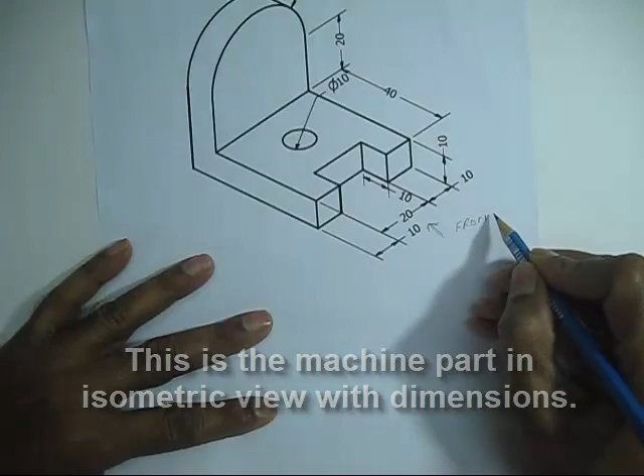In this video, we will learn how to draw orthographic projections of a machine part. So this is the small machine part given here, and this is the front view. We will use this view as the front view. Then this will be the top view, so looking from the top.

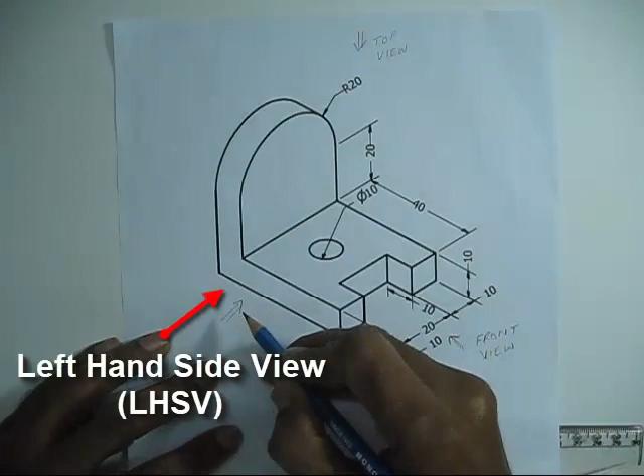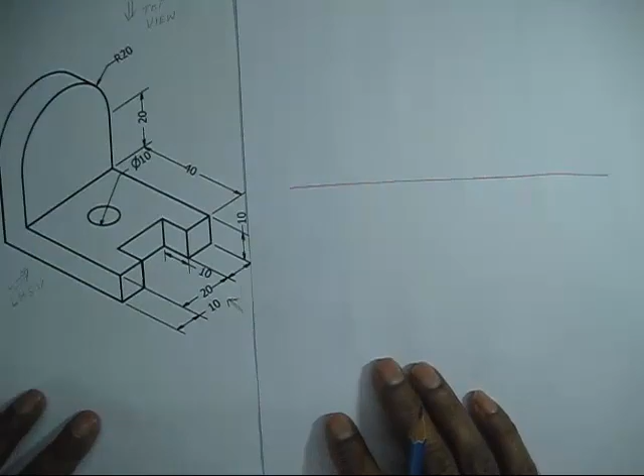And from the left hand side view, we will see how we present the left hand side view. Let us first try freehand sketching before we draw it on a drawing sheet. First we draw the reference line XY, and the front view will be above the reference line XY. We start from the base of this machine part. The base is divided into three parts as shown here.

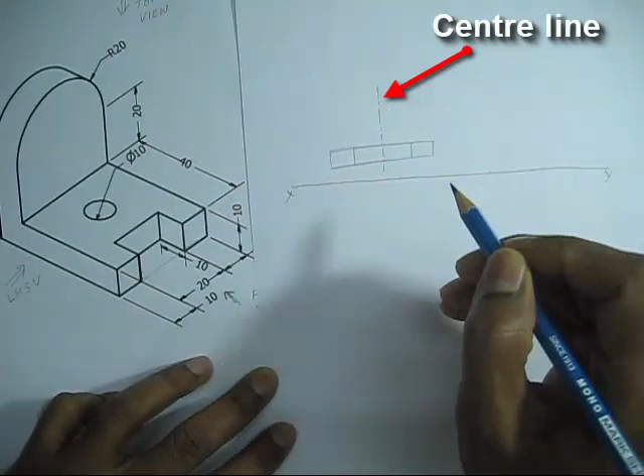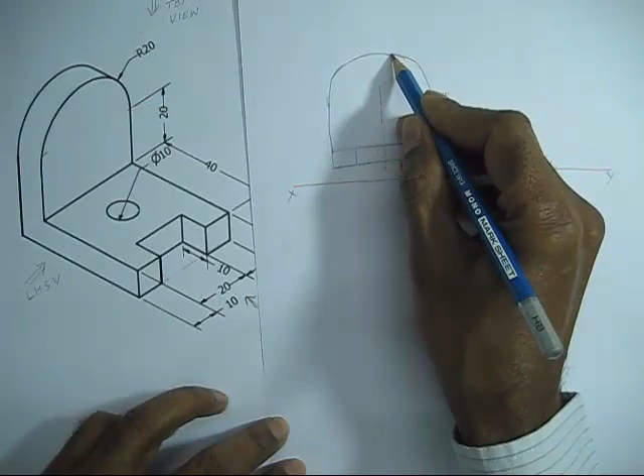This is the center line. This part is 20 mm above the base, and beyond this it is semicircular with radius of 20 mm. Now the central hole will be shown as dotted line in the front view.

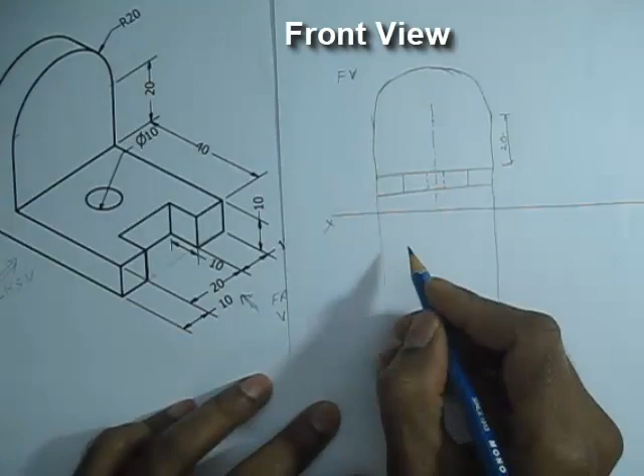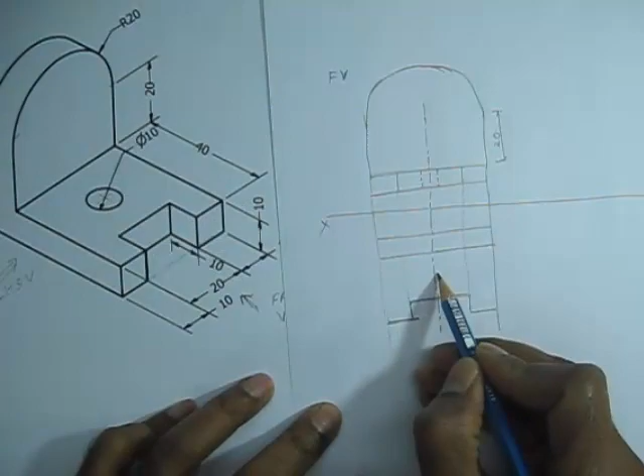Now the top view will be below the XY line, below the reference line. So this thickness of the vertical part, and then we see the top view. In the top view we will see this cut part. The center line can be extended further down, and the central hole will be drawn on the center line. Location of this hole is not given here, so we will assume it at the center.

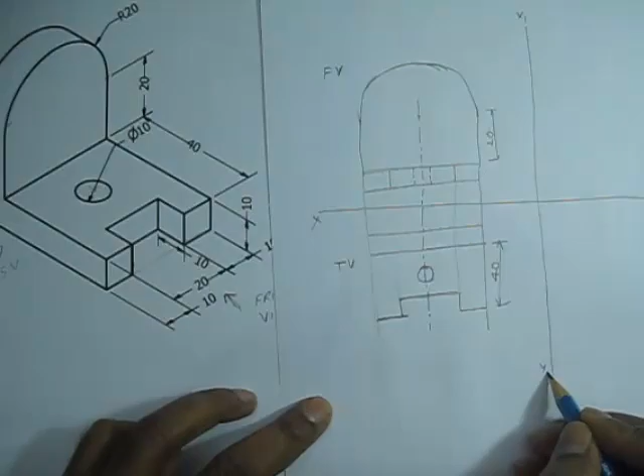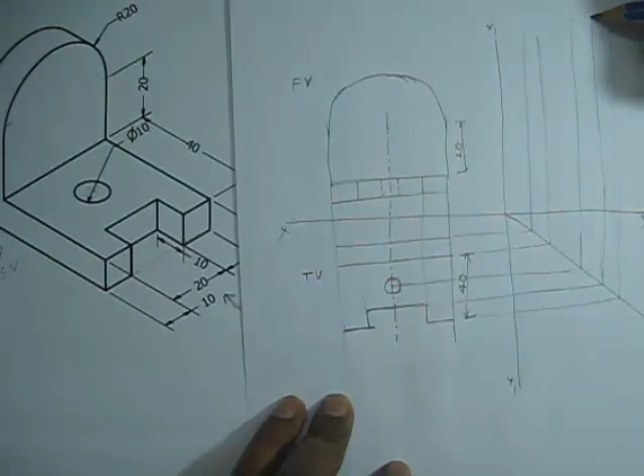Now this is the top view, and then we will draw the left hand side view. So first we draw another reference line X1Y1. We draw a line which is at 45 degree to the first reference line, and we extend the construction lines as shown here. So these construction lines have been extended in the vertical direction upward, so that we pass all the dimensions for the left hand side view. From the front view also we project all the dimensions for the left hand side view.

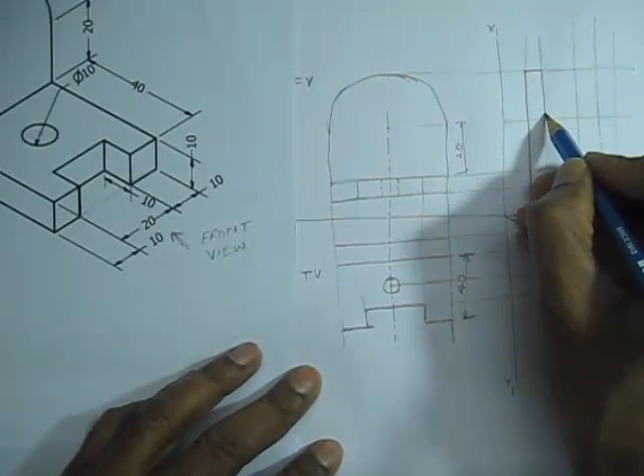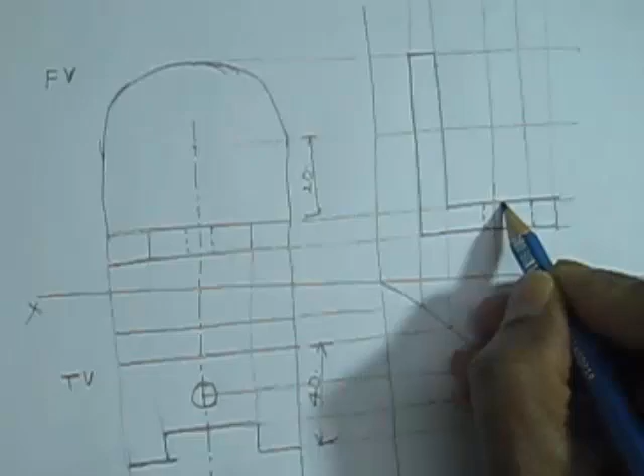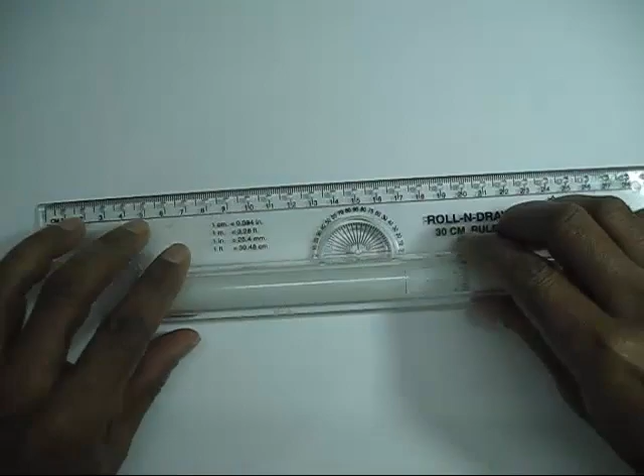Now the left hand side view can be formed using the projection lines. These are construction lines. So the left hand side view will be like an L shape. And here these features will be shown as dotted line because these are not visible in the left hand side view. The central hole will also be shown as dotted line. So this is the left hand side view of this machine part. So now we will draw this on a drawing sheet.

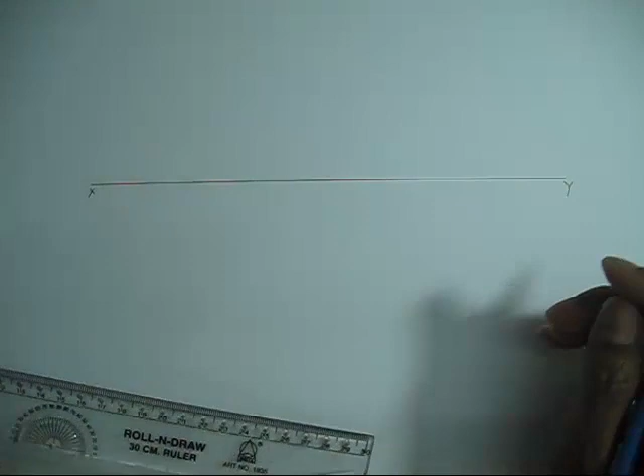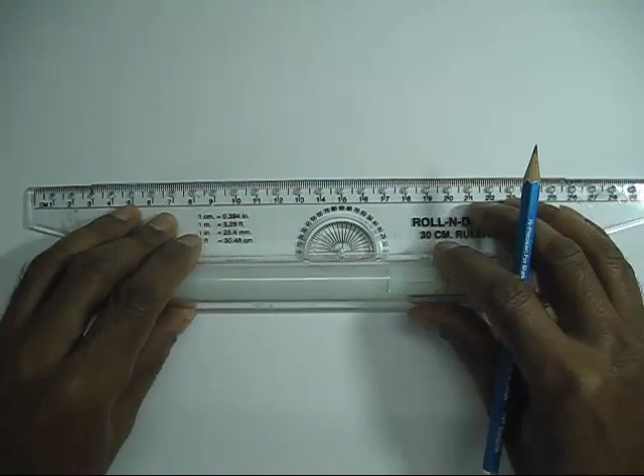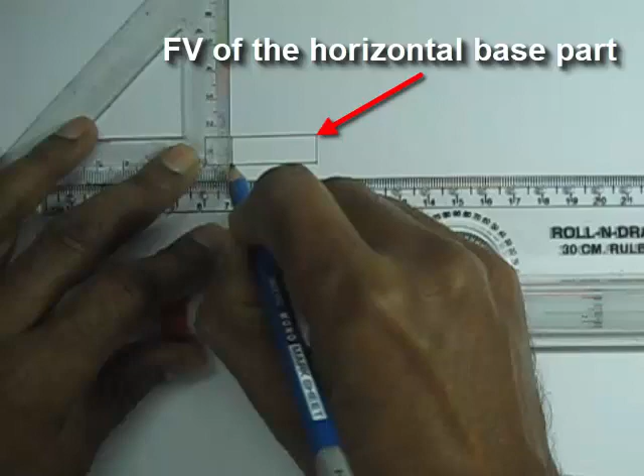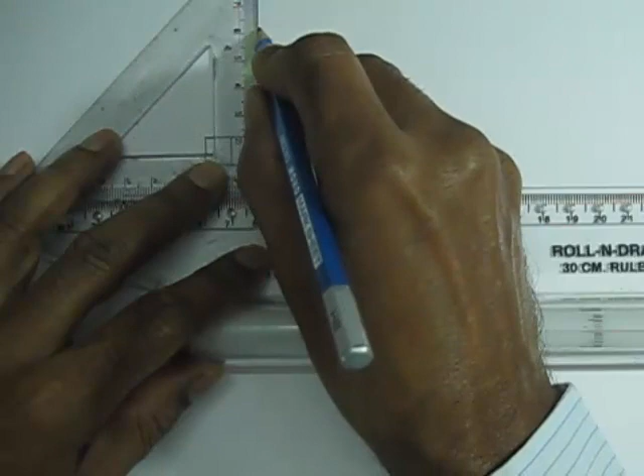Reference line XY. We will again start from the base for the front view. So this is the base of the front view, which is divided into three parts. The center line can be drawn here. Center line can be extended further down for the top view.

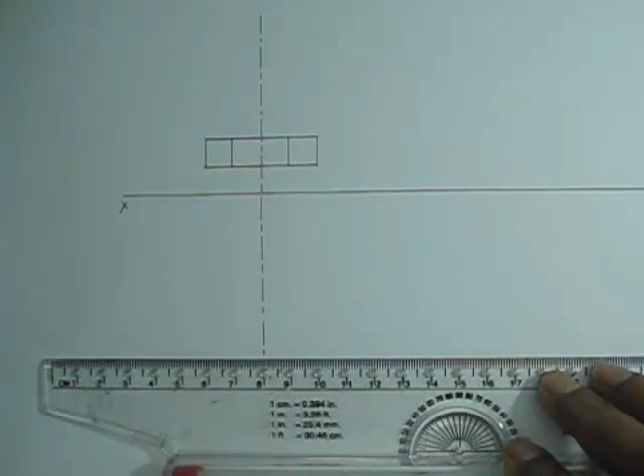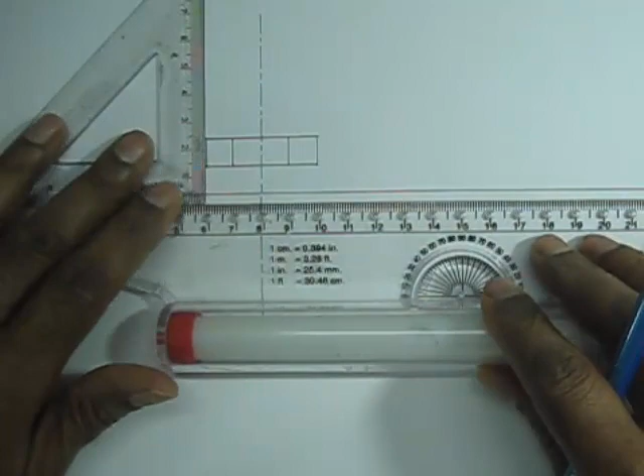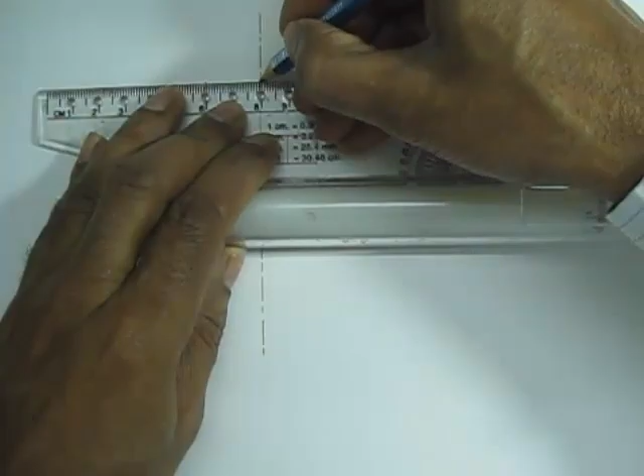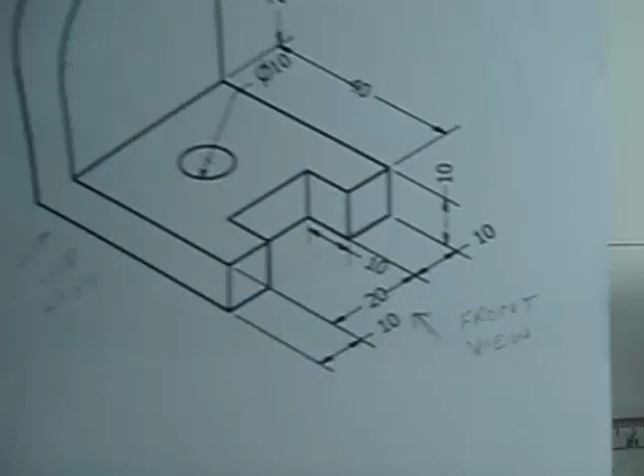Now the base part is ready. Above it, we will draw the vertical part. So first 20 mm above the base. Then on top there is a semicircular part. This is the center of the semicircle. Now the vertical part is also ready.

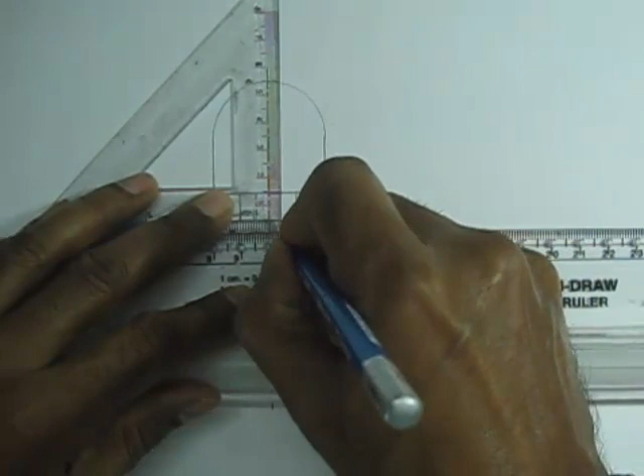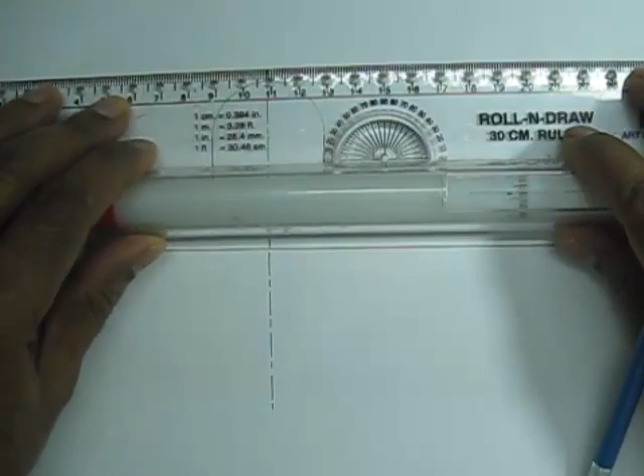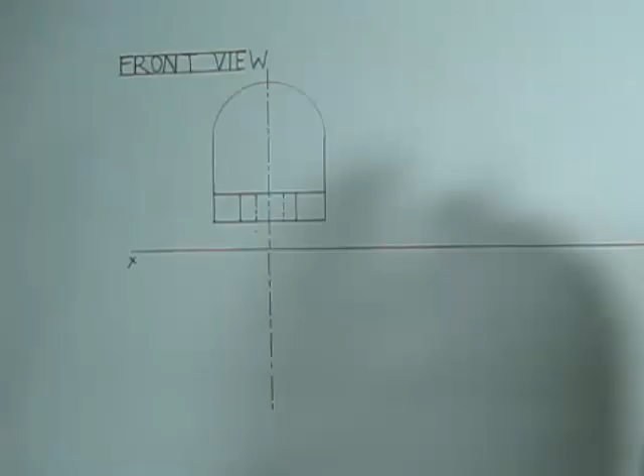Now we will make the hole. The central hole will appear as a dotted line in this case, because this hole is not visible in the front view, but the presence of this hole is recognized by drawing a dotted line. So two dotted lines for the central hole. So this is the front view. So the front view is ready.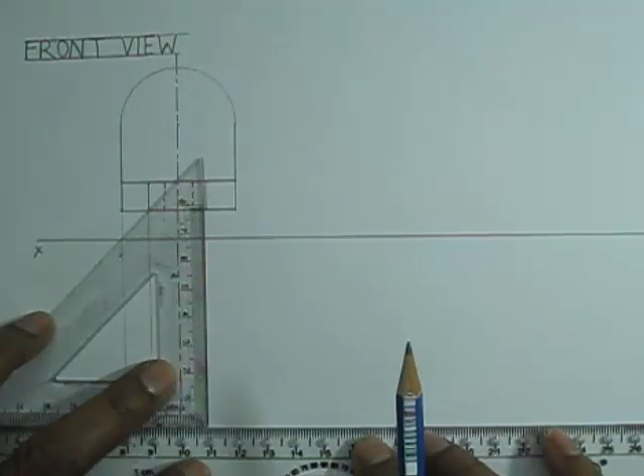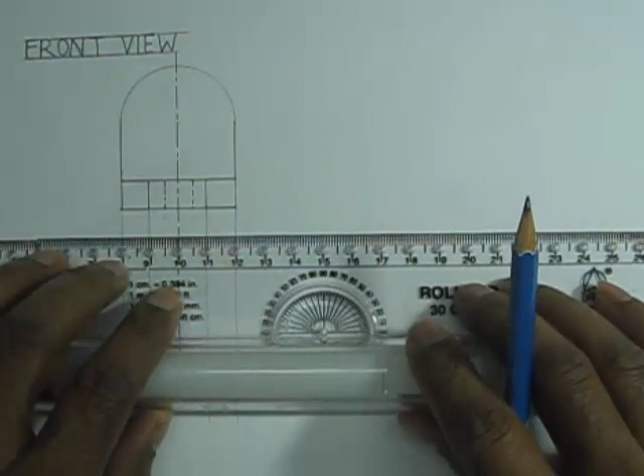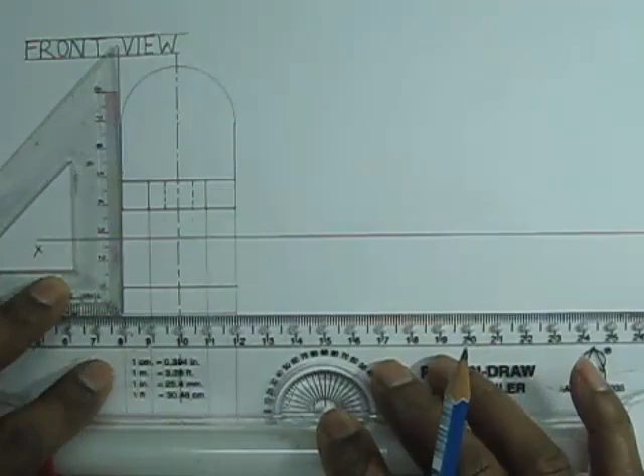Now we will make the top view of this machine part. So we extend all the dimensions using construction lines. The top view will be drawn below the reference line in the first angle projection system. So in the top view, the vertical part will be seen. So we will start with the vertical part. The semicircular part will be seen as a rectangle here in the top view. Thickness of the vertical part, we will take it as 10 mm.

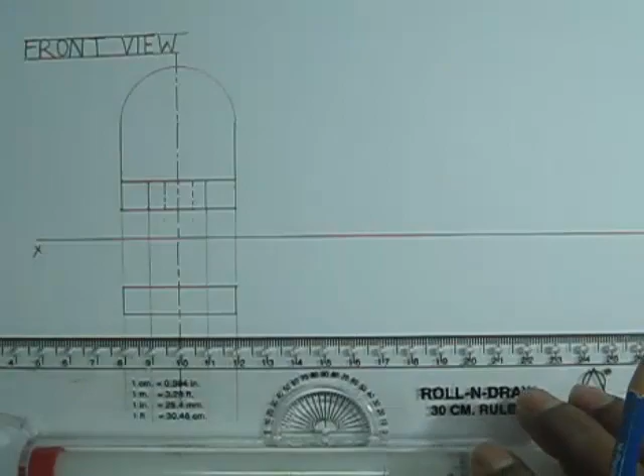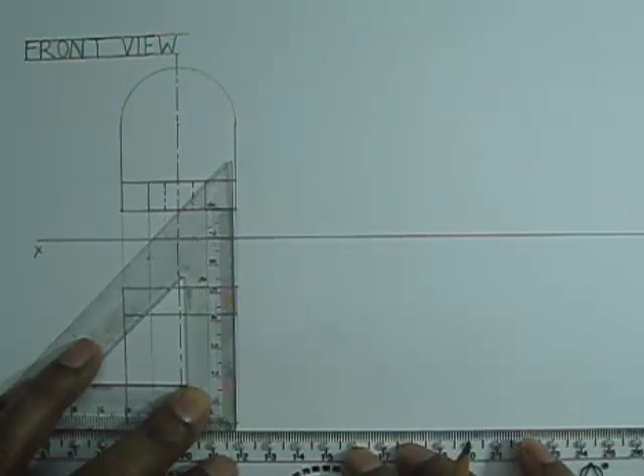So the vertical part will be seen as a rectangle, and the remaining parts we will draw. Outlines are always drawn as thick lines.

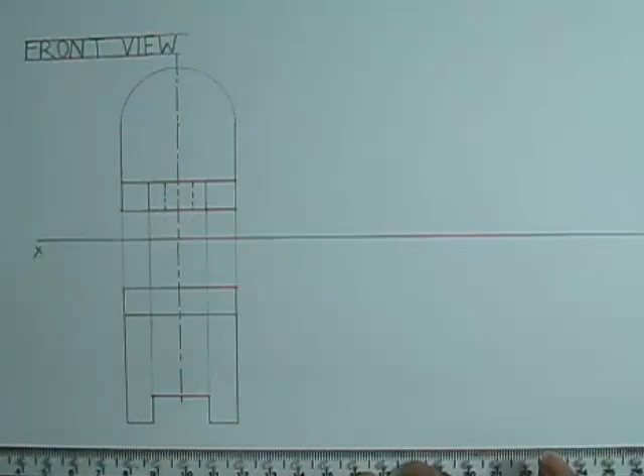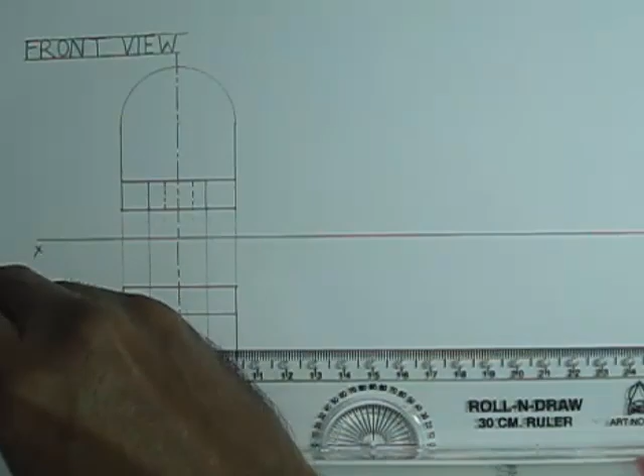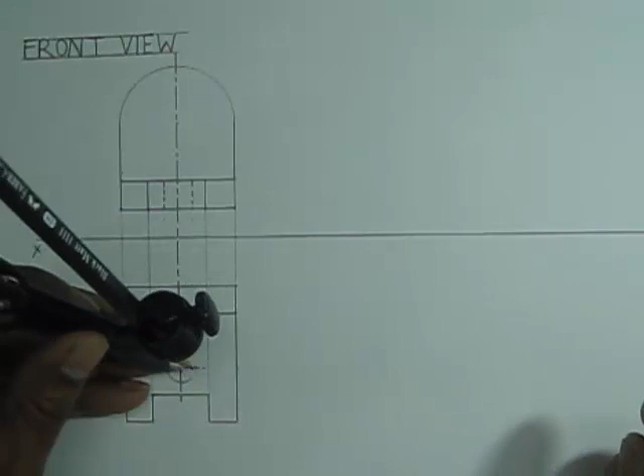So we will make the central hole in the center of this top view. The radius of this hole is 5 mm. So we will make the hole of 5 mm radius. This hole will be visible in the top view. Therefore, it will be drawn as solid line. So the top view of this machine part is ready.

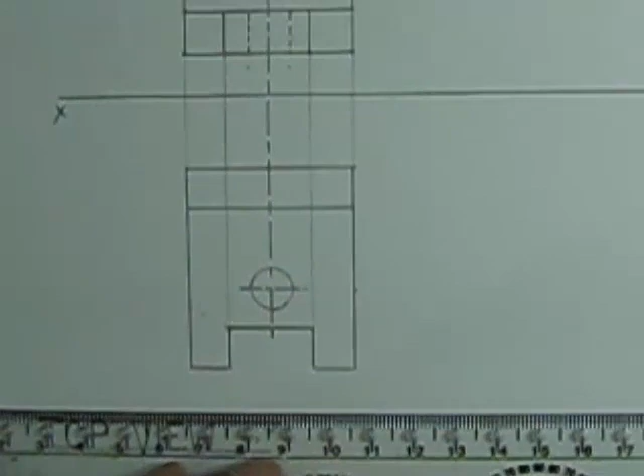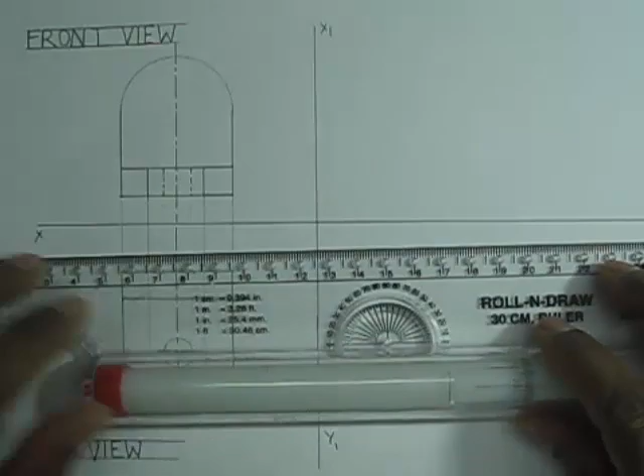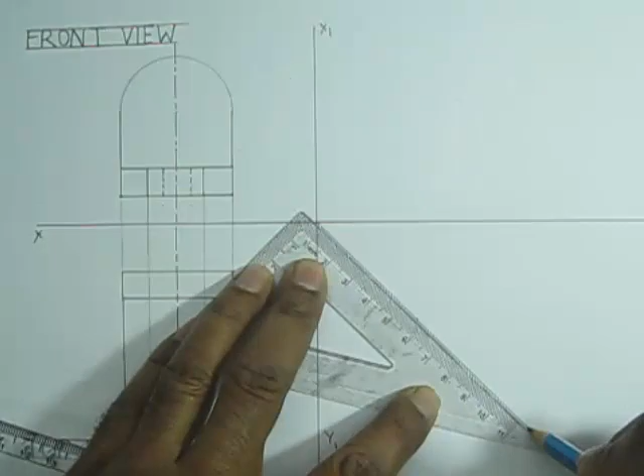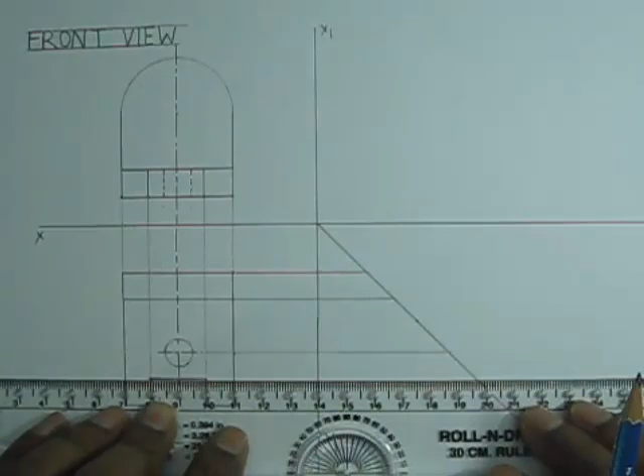Now we will make the left hand side view. So for that, first we draw another reference line X1Y1. And then we draw a line at 45 degree to the first reference line XY. Now using this line at 45 degree, we can transfer all the dimensions from the top view for the left hand side view as shown here. So these are all construction lines, so they should be thin lines.

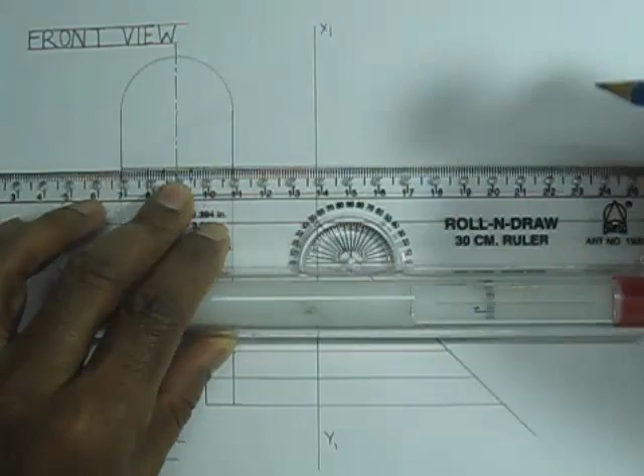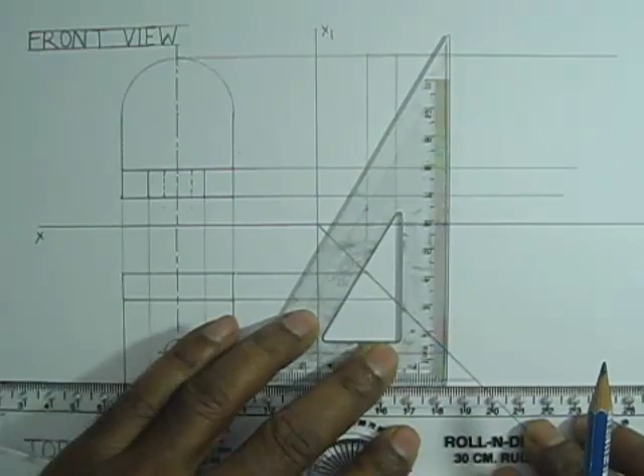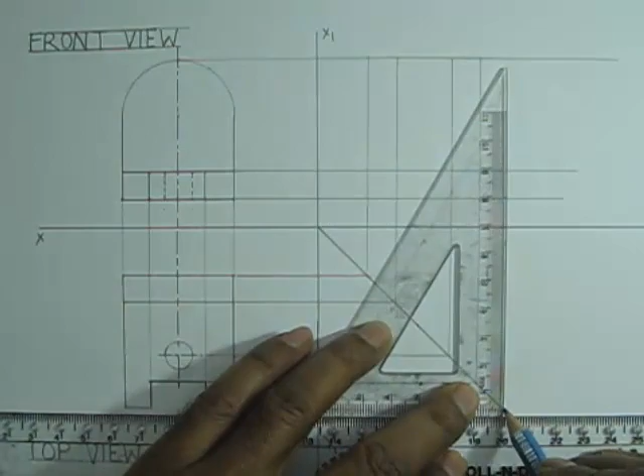So these are the projections from the front view. Again, all the dimensions are transferred for the left hand side view, so we do not have to do measurement again. So these dimensions are from the top view. So now we can draw the left hand side view using these construction lines. So the side view will look like an L shape.

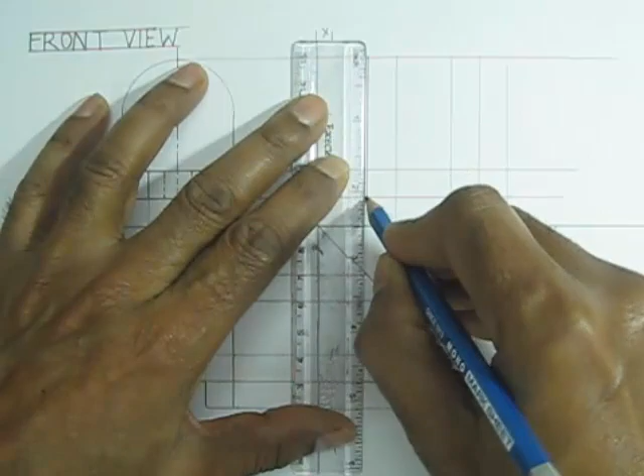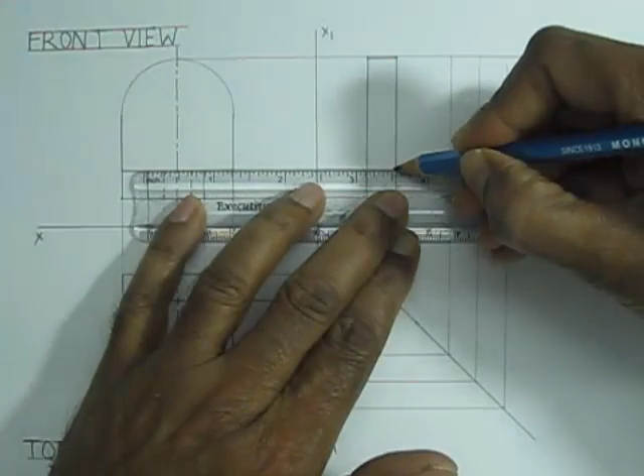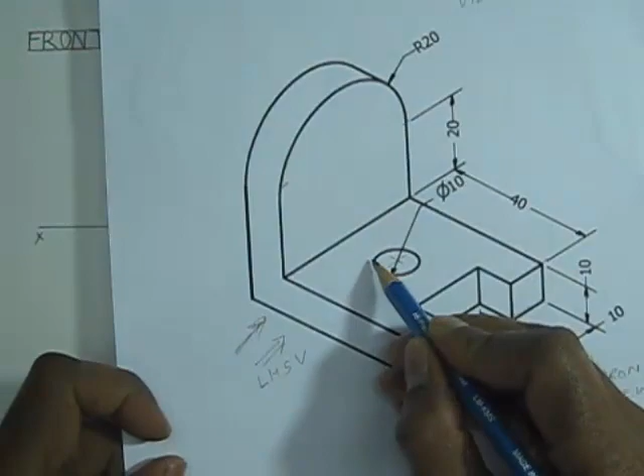The vertical semicircular part will be shown as a rectangle in the left hand side view. So this is the side view of this machine part. These edges will appear as dotted lines. So we will draw the dotted line for these edges which are not visible in the left hand side view, but the presence of these is recognized. Similarly, the presence of this hole will be recognized by drawing a dotted line.

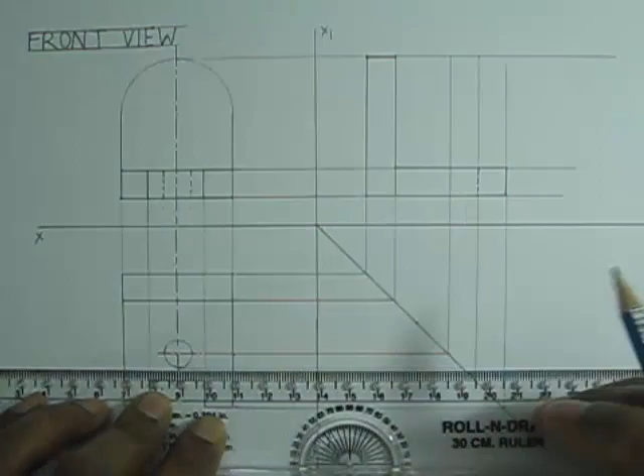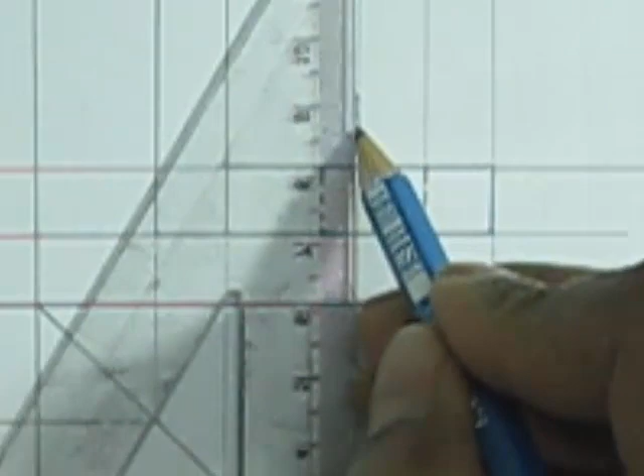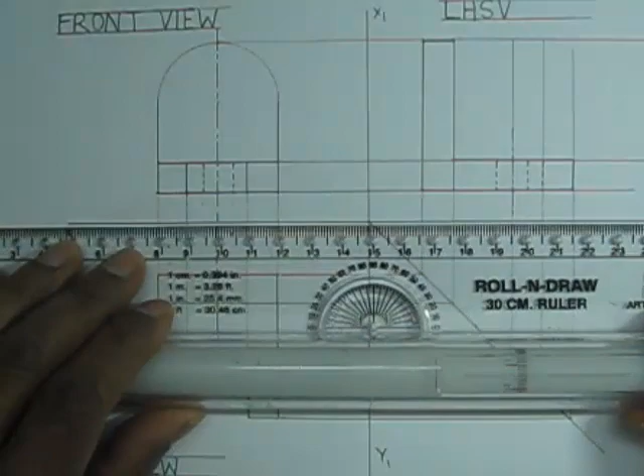So the radius of this hole is 5 mm. So we can transfer the dimensions of the hole to the left hand side view, and we draw a dotted line to recognize the presence of the hole. This is the center line. So the left hand side view of this machine part is also ready. So this is the left hand side view of this machine part. In the first angle projection system, we present the left hand side view on the right side of the front view.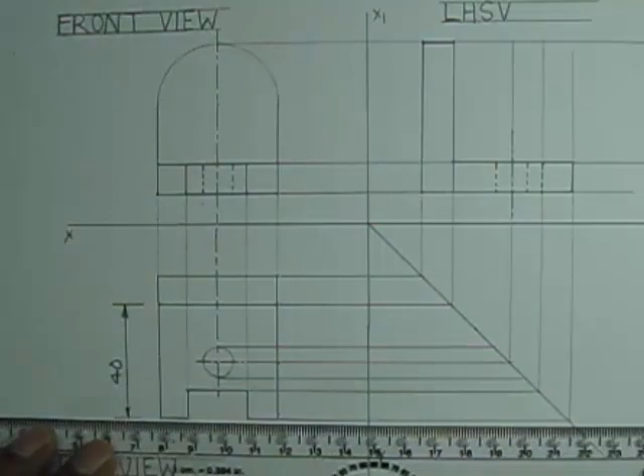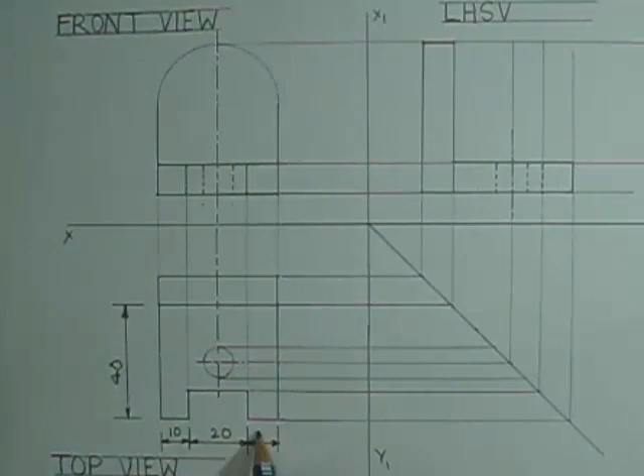Now we will do the dimensioning of the top view and the front view. This is 40 mm. These dimensions are 10 mm, 20 mm, and 10 mm. This vertical piece is 40 mm. This base of the machine part is 10 mm.

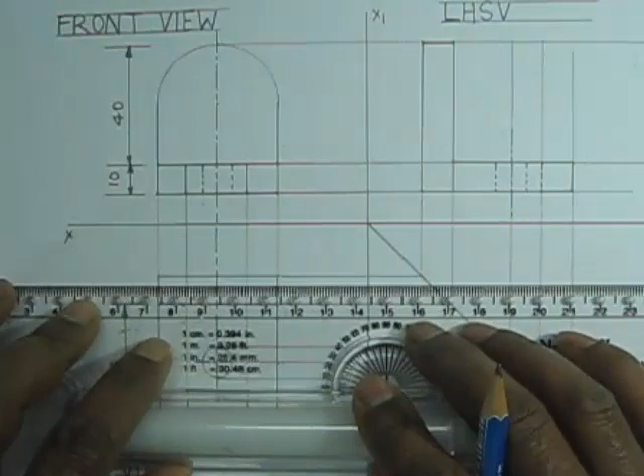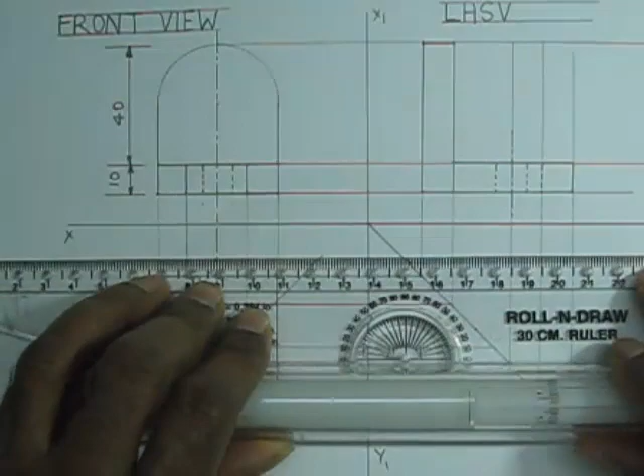Now in this case we do not have to dimension the left hand side view because all the dimensions have already been represented in the front view and the top view. Radius of this hole is 5 mm. So we write R5. R stands for the radius.